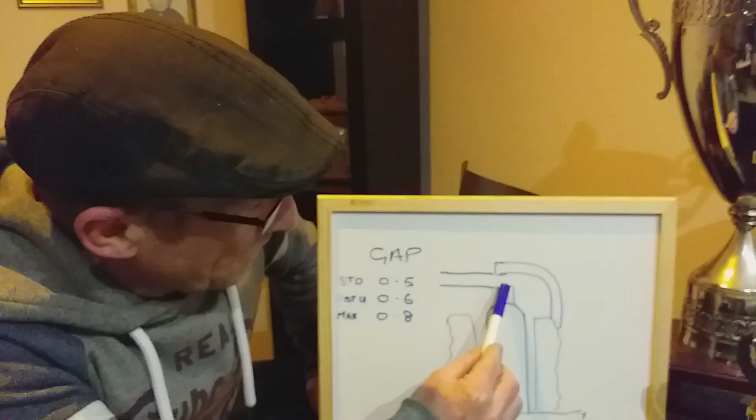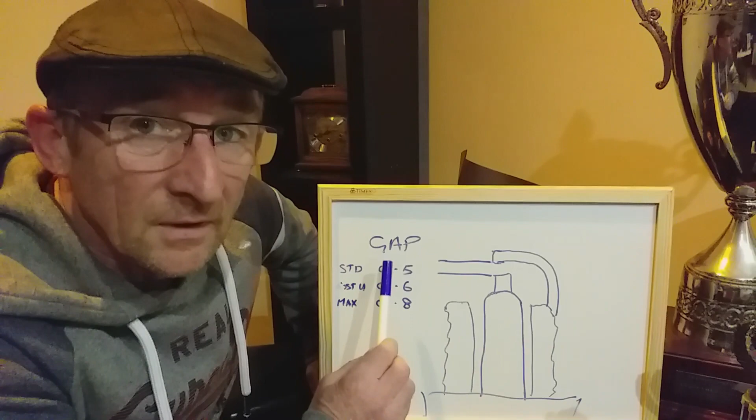Okay, I've had to go to a whiteboard to try and explain this, it's just the easiest way to do it. So I've got a little sketch here of a spark plug. Here's the gap which you measure between the electrodes, this is the earth electrode and the positive electrode. So the original Lambretta spark plug gap is 0.5 millimeters. That came out on every model, all had the same spark plug gap.

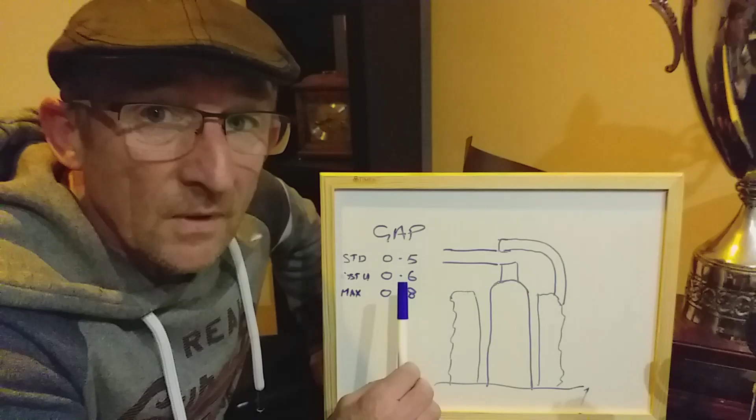But most commonly used at the moment by nearly all the workshops in the UK and Germany, wherever, is 0.6. So what they've done is they've increased the gap, because now we have a little bit better ignition systems. They've opened the spark a little bit more to give you a better burn. The maximum gap you should be able to go to is 0.8.

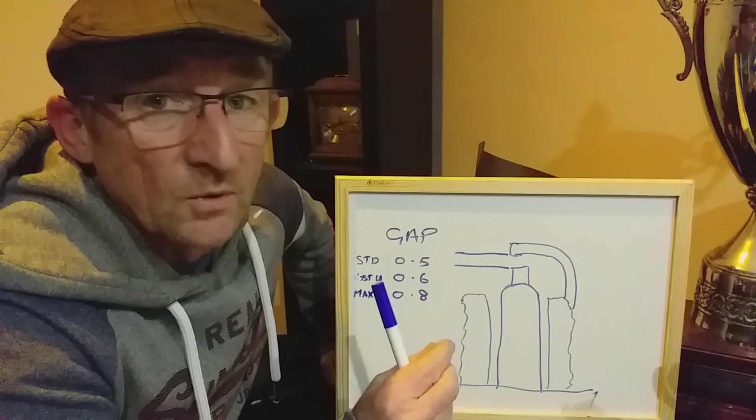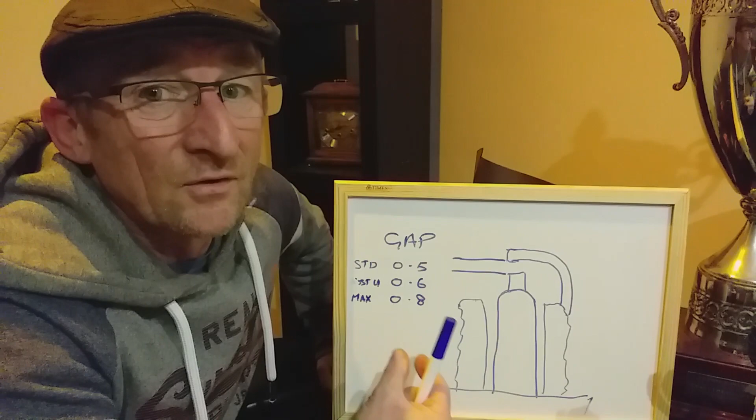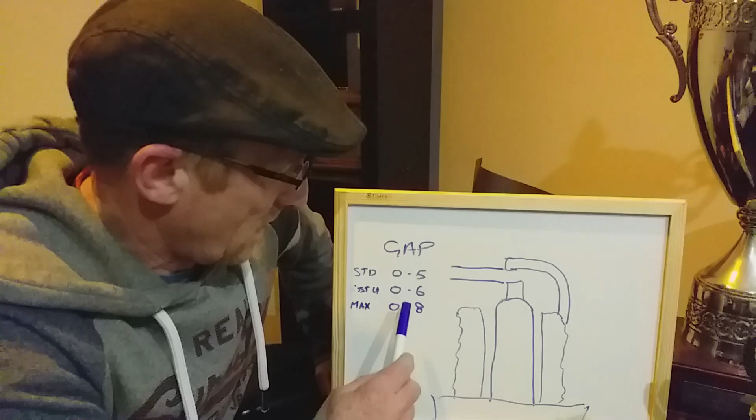This is going to open up the spark more. It should burn more fuel and more efficiently, but you're on the edge, because increasing the gap increases load on your ignition coil, because it's producing more voltage. When it gets up too high, that's when you start getting problems. So beware, 0.8 is the maximum. You start going above that, you're putting too much stress on the ignition system.

Well, hello there. I just went out and got myself a brew, and I watched a bit of Kickback Garage, and I must say I'm really jealous of his BSA, it's looking brilliant. I'd like to promote him as well, because he's pushed me and asked his followers to come and watch my channel, and well, I've got to do the same back, man, you know what I mean? Anybody who watches me, they need to watch Kickback as well. He's a great guy, and he does some really professional work, and his camera work's damn good as well, even though I'm trying to get mine better.

But it's early doors, and we're only just starting, so let's see how far we get. Let's carry on.

With another little project, I got this today through the post, my Kawasaki filter. It's off a motocross bike, and this is another future project that I'm going to do. It's going to be fitted on the inside of the side panel for a TS1, because there's very little room between the side panel and the carburetor. All the filters I've tried, nothing works properly, so I'm going to develop this one with a backing plate with an inverted venturi, and then it'll be tested, and I'm thinking it's going to be good.

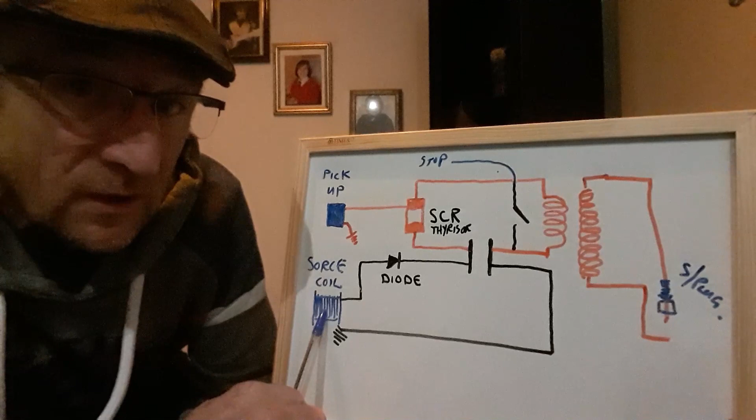Okay, here we go. Here's a little drawing of a CDI that I've just sort of mocked up, probably stole it from somebody on the internet, but I've modified it a little bit so it's more like a Lambretta ignition. So we've got the source coil, which manufactures our voltage that goes up to our capacitor here inside the CDI, and we've got the pickup coil, which is also on your stator plate - that is your trigger. That triggers the SCR switch or thyristor.

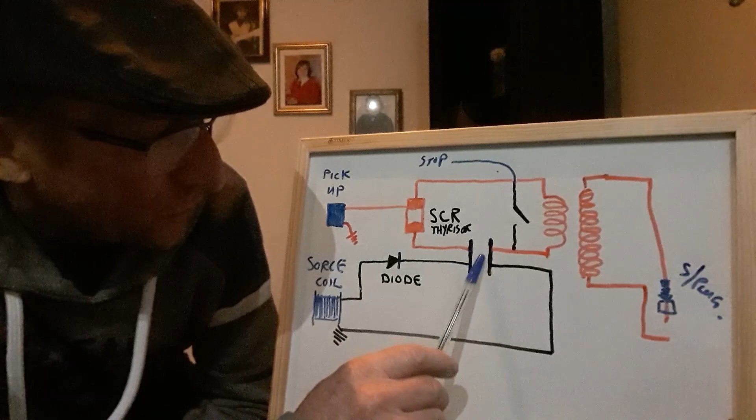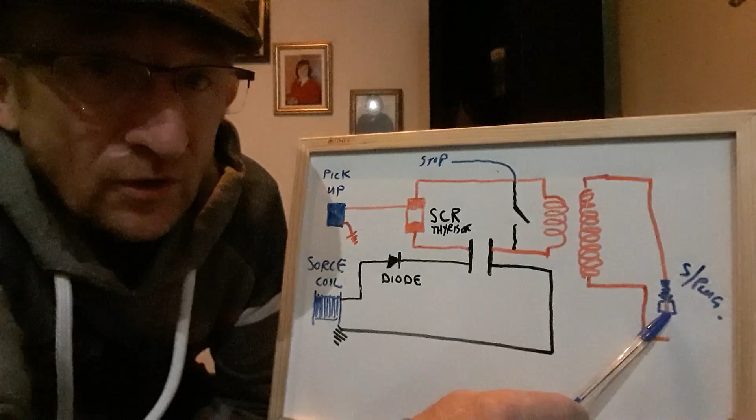What happens is the source coil charges the capacitor, that increases in voltage, stores it up, and then it's released when your pickup is activated. So as your flywheel comes round, comes in line with the pickup coil, and your ignition timing lines up, bang, it opens the switch, discharges the capacitor into your first coil, your primary coil. The charge from that one is then amplified by the secondary coil, by the secondary winding, and then it discharges to your spark plug, and you get a nice big fat spark. Bob's your uncle, CDI.